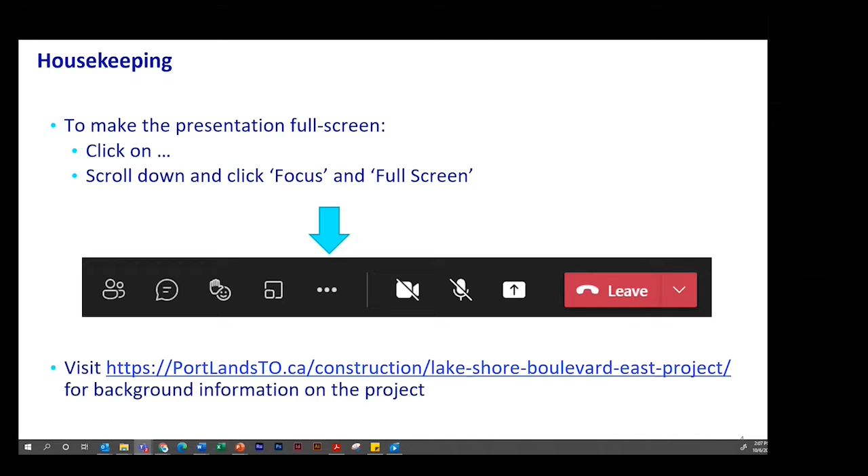So I'm going to ask Don to get us started in our presentation with the future plans section. Sure, thanks, Mara. I'll just quickly turn on my camera so people can see I'm a real person, and then to save some bandwidth, I'll turn it off. So starting with the big picture future plans, next slide, please.

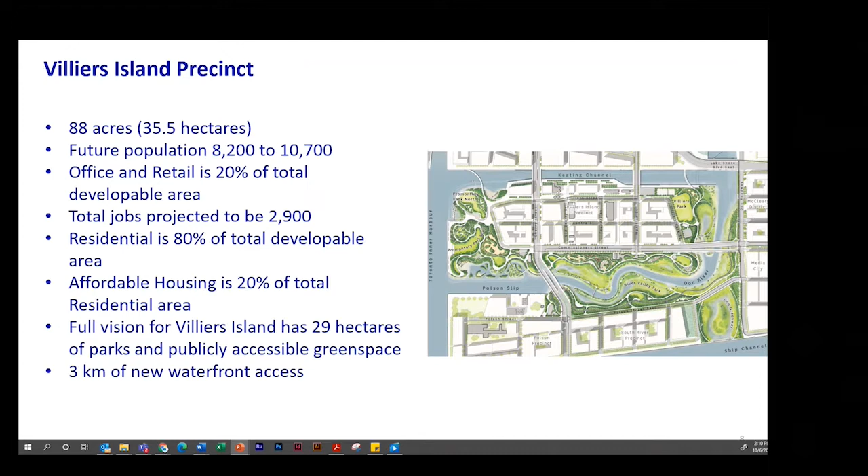The development is largely residential, of which 20% will be allocated for affordable housing, plus a generous amount of green space that's tied in with the waterfront along the Toronto Harbor on the west side, as well as the south side of Villiers Island, and it ties in with the green space along the new river channel. Next slide.

The Gardiner East project - I'm sure many of you are familiar with it. It's part of a larger program to rehabilitate the entire Gardiner Expressway that the City of Toronto is undertaking. The focus as it relates to the Portlands area is the section that lies east of Cherry Street, highlighted in red, showing the new proposed alignment for the elevated section of the Gardiner to tie in with the DVP.

And then the blue shows the new realigned Lakeshore Boulevard East section. Again, both the Gardiner and Lakeshore Boulevard are being relocated further north, away from the existing Keating Channel. Next slide.

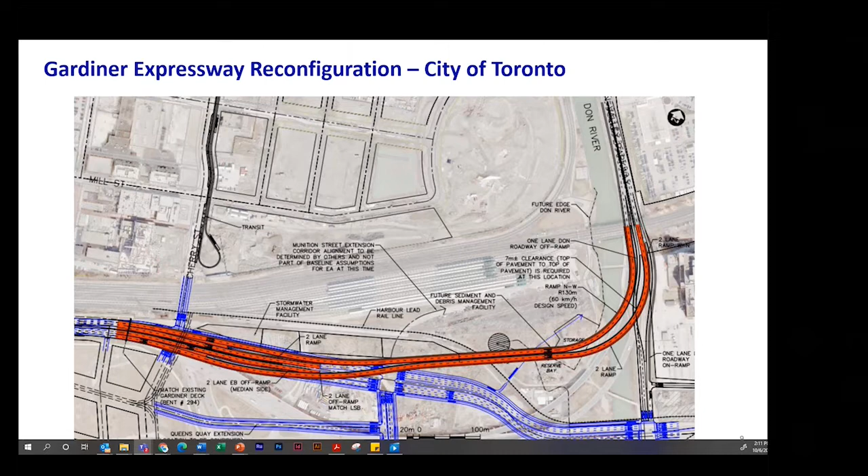So tied in with the Gardiner is the Keating Channel precinct. Again, these are the lands that lie between the Keating Channel in the south, and the rail yard, the Metrolinx rail yard, in the north.

In 2010, a Keating Channel precinct plan was released. It includes future development for mixed use, including both employment lands and residential. The key point here is that with the transformation of the Gardiner and other projects, there is a need to update the Keating Channel precinct plan to make it consistent with these infrastructure changes.

There was some visioning of development in the Keating Channel precinct area as part of the Gardiner EA, but those plans definitely need to be confirmed, and the City of Toronto will be undertaking an exercise to update the plan for this precinct. Next slide, please.

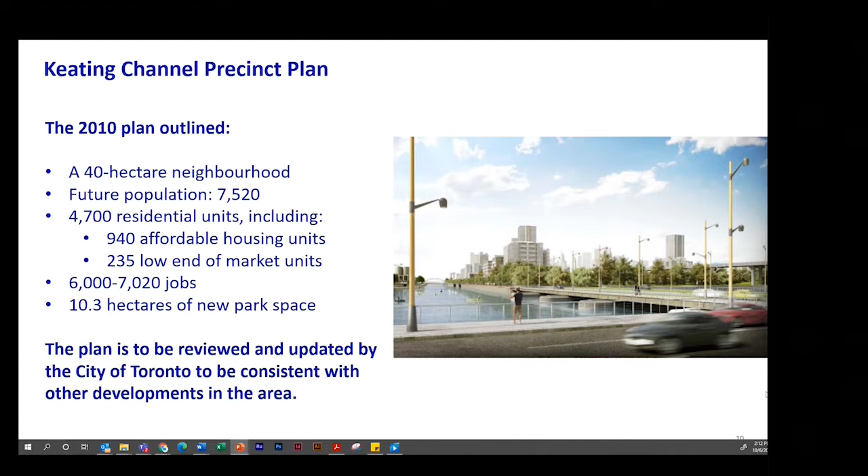So then zeroing in a little bit on some of the key projects, starting with the Portlands Flood Protection Project. Next slide.

So this image map shows or highlights the focus of the Portlands Flood Protection Project, which is the light blue area - lying south of the rail tracks, north of the ship channel, to the west of Don Roadway, and to the east of the Toronto Harbor. That's really the focus of the Portlands project.

And again, a key focus of these works is to alleviate flooding problems in the Lower Don area, and to allow new development in this area. Next slide.

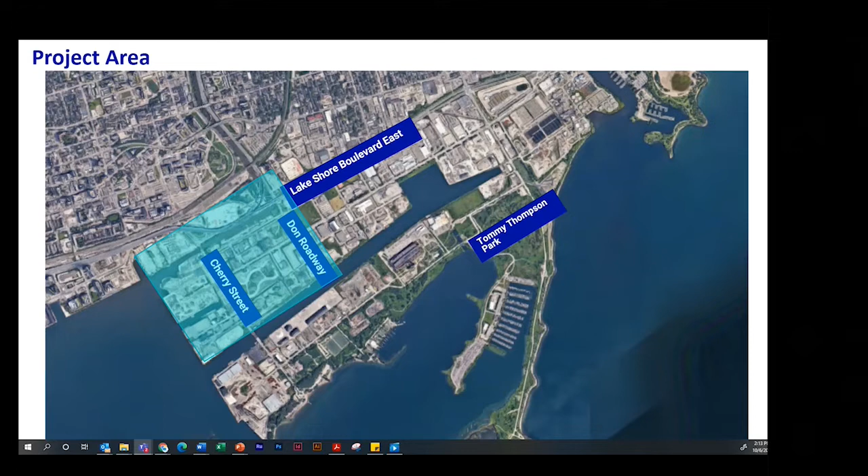So this slide shows what was recently the current condition of the Portlands area, highlighting the street network - Commissioners and Villiers being the major east-west streets, and Cherry, Munition, and Don Roadway the north-south streets - and the existing Keating Channel, which is at this point the major outlet for the Don River. Next slide.

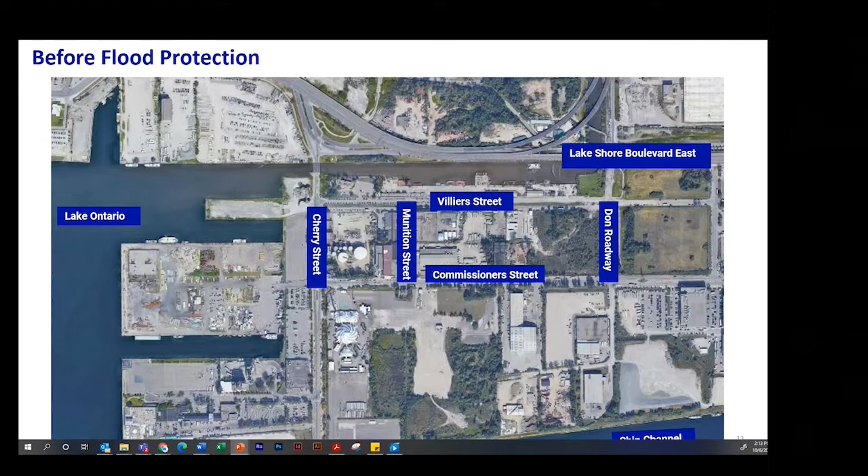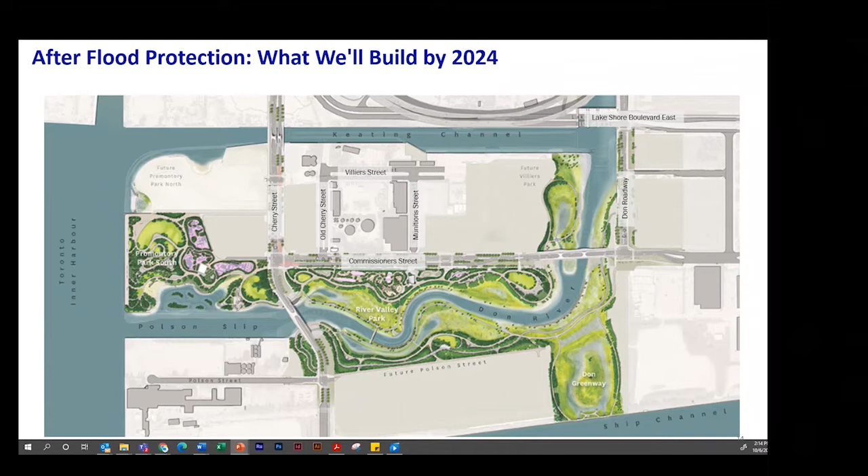And this slide shows what the transformation of the area will be by 2024, showing the second outlet, the new channel for the Don River that will extend through the Portlands, and the creation of new green space along the new river channel, as well as green space along Toronto Harbor, and the area just lying to the north that I spoke to earlier, the Villiers Island area, that will also be redeveloped. Next slide.

So then moving on to Lakeshore Boulevard East. Next slide.

So as indicated earlier, the City of Toronto is embarking on a long-term rehabilitation program for the entire stretch of the Gardiner Expressway, extending all the way over to Highway 427 in the west, to the Don River in the east, which is the focus of our works that are currently ongoing.

Most recently has been the rehabilitation of the Jarvis to Cherry section. And then with that will be the continuation of the Gardiner East project, which is the realignment of the Gardiner between Cherry and the Don Valley Parkway, to occur in the 2026 to 2030 period. Next slide.

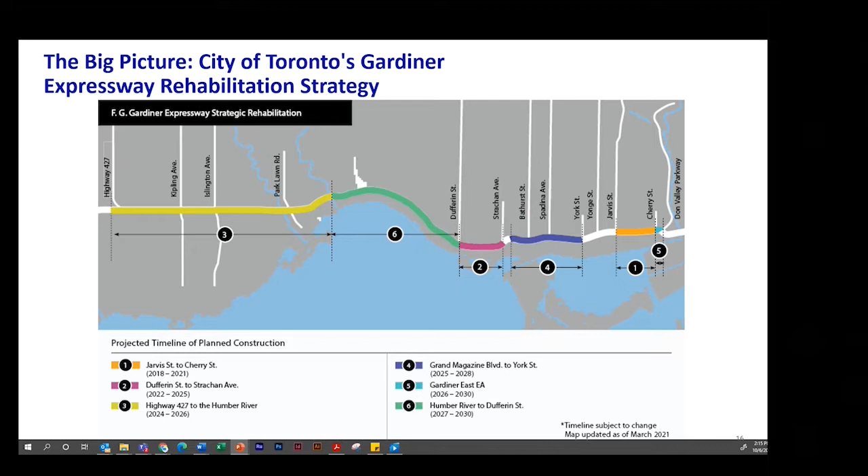So talking a little bit about the Gardiner Expressway project. This project was commenced as an individual environmental assessment in 2009, focused on the most eastern section of the Gardiner Expressway, extending from Lower Jarvis over to its eastern terminus.

A preferred alternative was developed through the Gardiner Expressway East EA. This environmental assessment received approval both by City Council and the Province of Ontario, as it was an individual environmental assessment. The key components include maintenance of the overhead Gardiner Expressway between Jarvis and Cherry, but improvements to Lakeshore Boulevard and public realm pathways beneath this elevated section. Then the removal of the existing Gardiner DVP connection that runs along the north side of the Keating Channel, and relocating the Gardiner further north. The section between Cherry and the DVP, along with the realignment of the overhead Gardiner, is a realignment of Lakeshore Boulevard East.

Running between Cherry and the Don River crossing, and then east of the Don River is a removal of the overhead expressway, or what's known as the Logan ramps, that formerly touched down to Lakeshore Boulevard. Those have now been removed. And then the reconfiguration of Lakeshore Boulevard east of the river. Prior to the removal of the overhead Gardiner, Lakeshore Boulevard was split between eastbound lanes and westbound lanes. With this project, those lanes east of the Don River are being brought together in a more conventional arrangement.

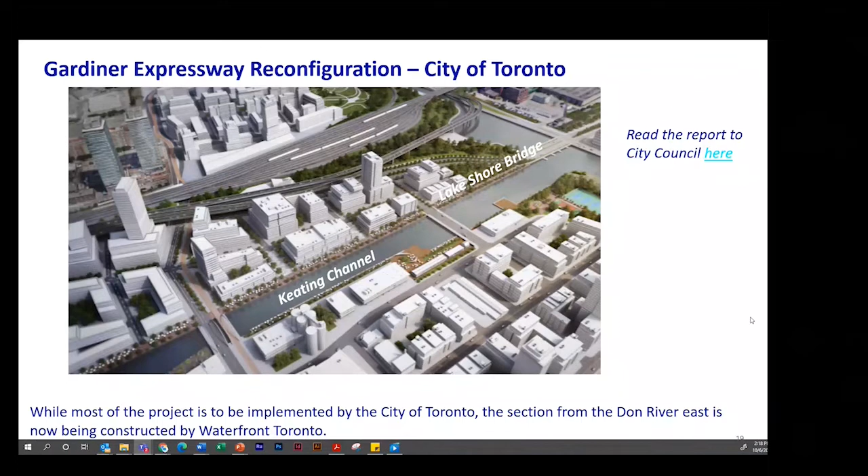So in terms of what's happening now, we talked about the big picture, long-term vision for the area. We're now going to zero in a bit more on what is happening now. Waterfront Toronto is now embarked on the implementation of some elements of the Gardiner East project, as well as the Portlands flood protection project.

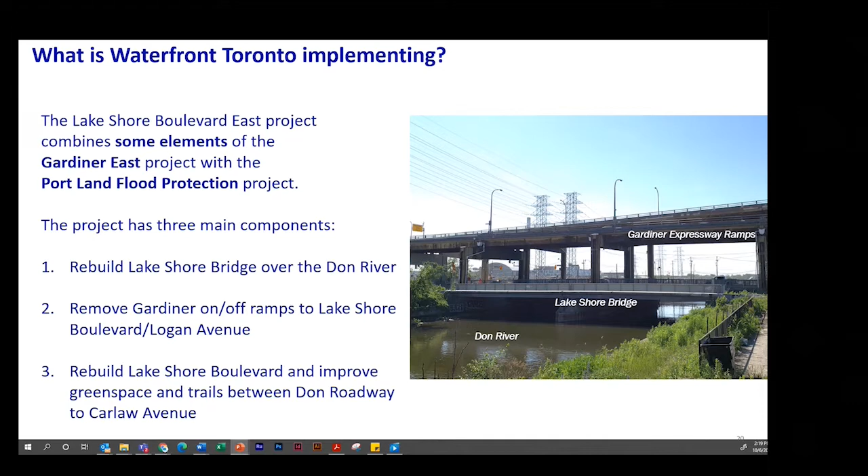This project has three main components. First, it includes a rebuild of the Lakeshore Bridge over the Don River, the removal of the Gardiner on-off ramps, or the Logan ramps, which has now happened, and then the rebuilding of Lakeshore Boulevard over the new bridge, extending east over to Carlaw.

It would also result in 2 years less of traffic disruption. Instead of rebuilding the bridge for flood conveyance reasons and then going back in the future for transportation reasons, it's all being done at one time, resulting in less traffic disturbance. Thirdly, it's a much safer construction process if those overhead ramps are removed in advance of the reconstruction of the Lakeshore Boulevard Bridge.

And finally, advancing the Lakeshore East section of the project results in new pedestrian and cycle pathways, and public realm green space being realized along Lakeshore Boulevard East 4 years earlier than if the projects had been separated.

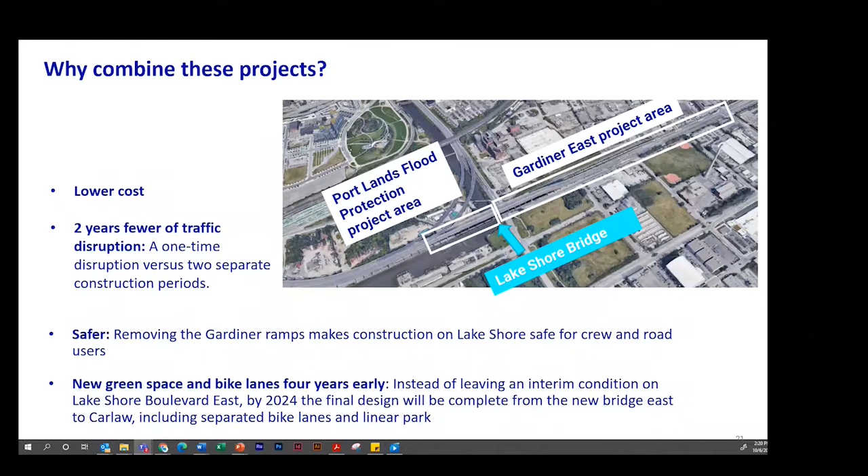The first component of the bridge project is to essentially lengthen the bridge, in an east-west direction, and create new bays. That's to improve river conveyance to flow under the bridge during flood conditions. So that's the lengthening component of the bridge, or of the project, again focused on flood reduction and improving river conveyance.

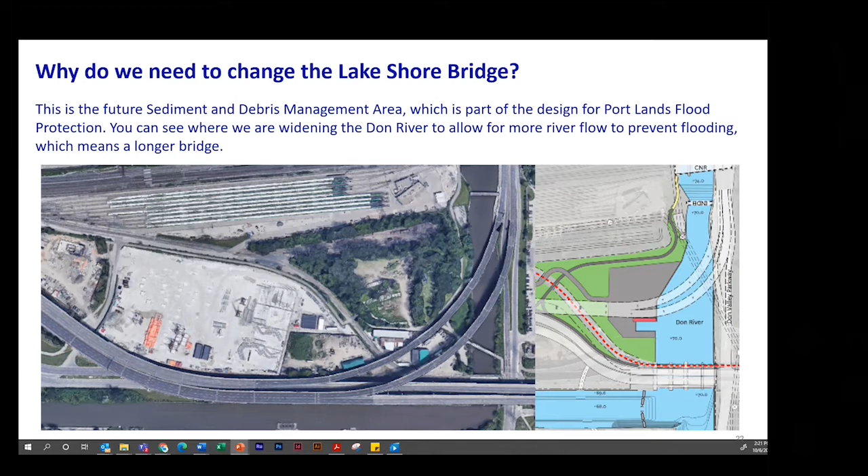The second part of the project is really for transportation reasons, and it involves a widening of the bridge. That's to allow for more space on the bridge deck for pedestrian and cycle movement, as well as improvements related to traffic flow. So again, the bridge is being lengthened and the bridge is being widened.

To do that, essentially it involves an extension of Lakeshore Bridge and the adjacent rail bridge by two spans, relocating utilities from the existing rail bridge, and the replacement of the Lakeshore Bridge and the rehabilitation of the existing piers and abutments.

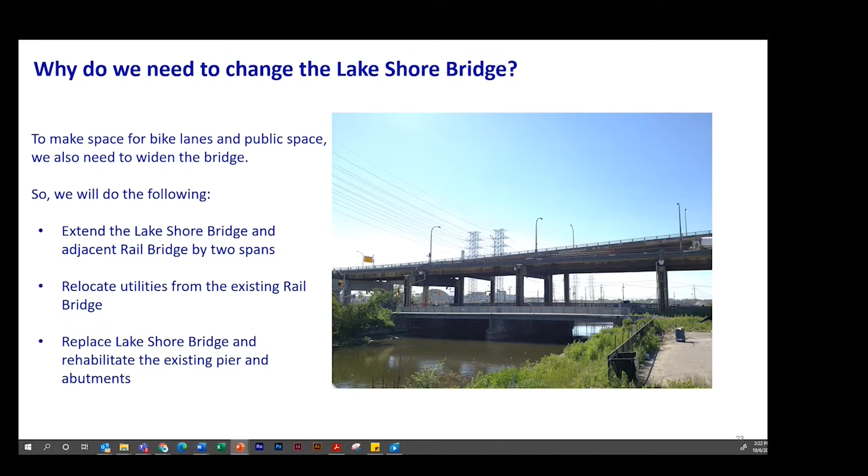So how are we changing Lakeshore Boulevard East? This is the section of Lakeshore Boulevard from the Don River over. These changes are being guided by two documents. First is the Gardiner East Environmental Assessment that presented a conceptual design for Lakeshore Boulevard. Then secondly, the subsequent Lakeshore Boulevard East Public Realm Plan that was developed to further advance the design for Lakeshore Boulevard from Jarvis Street over.

This Public Realm Plan is a vision for about 3 kilometers of Lakeshore Boulevard, and it develops in more detail the plan for the roadway, for public realm space, for green space, as well as active transportation facilities throughout the entire corridor.

This stage of the project includes the realignment of Lakeshore Boulevard from Don Roadway over to Carlaw Avenue. Even though for the most part Lakeshore Boulevard is being maintained within its existing right-of-way, with the removal of the Logan ramps there is more space for the roadway, so there's some adjustments to the alignment of Lakeshore Boulevard through this space.

New pedestrian and cycling facilities and landscaping on the Lakeshore Bridge and Lakeshore Boulevard from Don Roadway to Carlaw. And then the shifting of the existing rail tracks that sit on the north side of Lake Shore Boulevard, east of Don Roadway, to the center median of the new Lakeshore Boulevard, with the idea of connecting those tracks to the existing tracks at Carlaw, which are already in the middle of the roadway. Next slide.

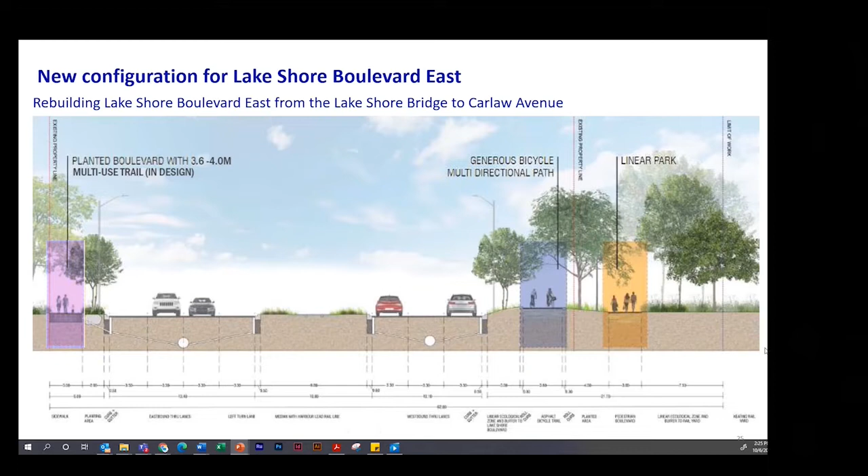Multi-directional cycle path, more plantings, then the pedestrian walkway, and then more plantings. Next slide, please.

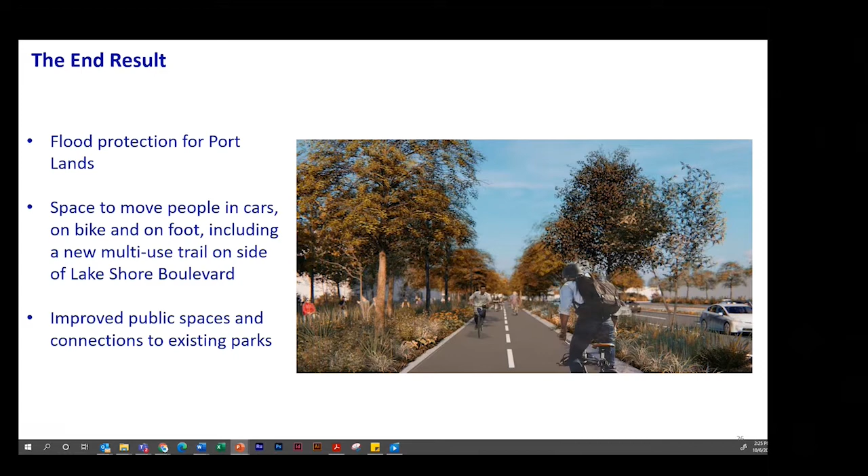So the end result of the project is flood protection for the Port Lands that will facilitate new development in the Port Lands area, creating new space to move people in cars, on bike, on foot, including a new multi-use trail along the north side of Lake Shore Boulevard, and improved public spaces and connections to existing space in the waterfront area. Next slide.

At this point, we're going to invite Julius from Waterfront Toronto to provide an update on the Port Lands construction. Thank you.

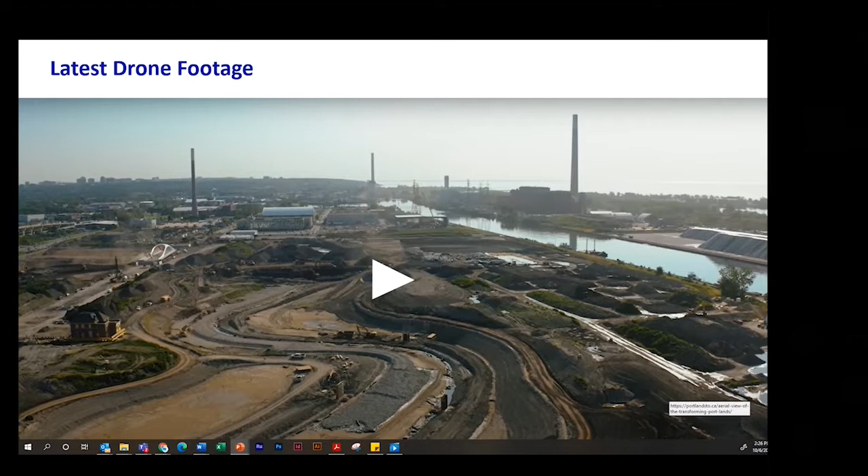Next slide, please. We're going to have a little drone footage over the site. This is quite recent.

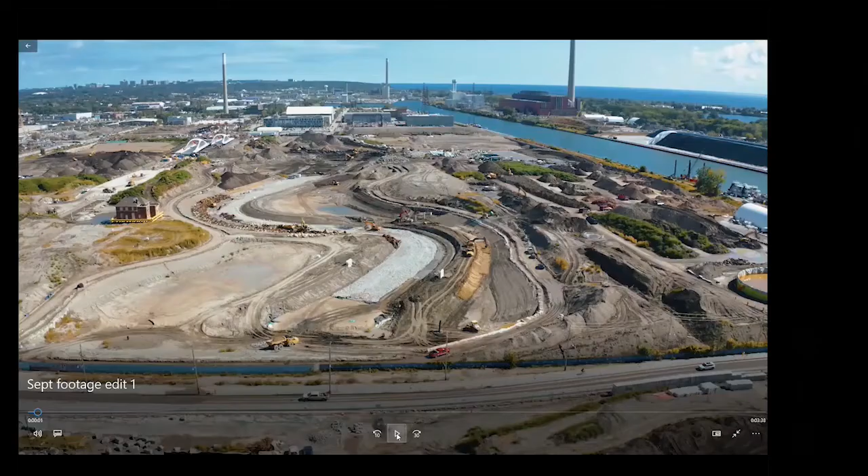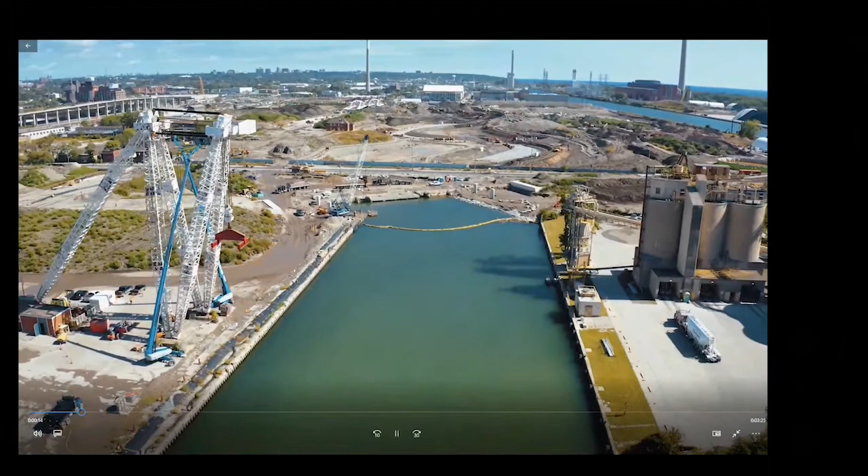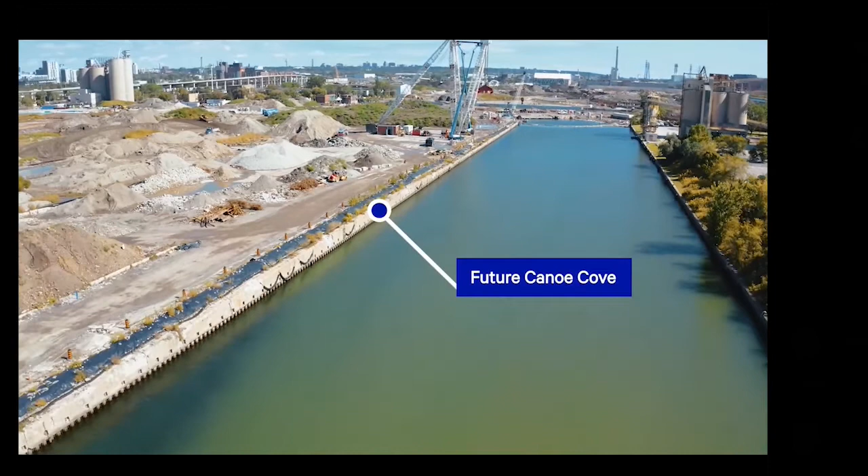We're looking over the river here. This is the new Cherry Street Bridge foundation that you're seeing in the Polson Slip. The crane is off to the left. We're just starting work now on the dock wall on the left side of the slip. This will be becoming Canoe Cove, where we'll be setting up smaller islands and public access to the water.

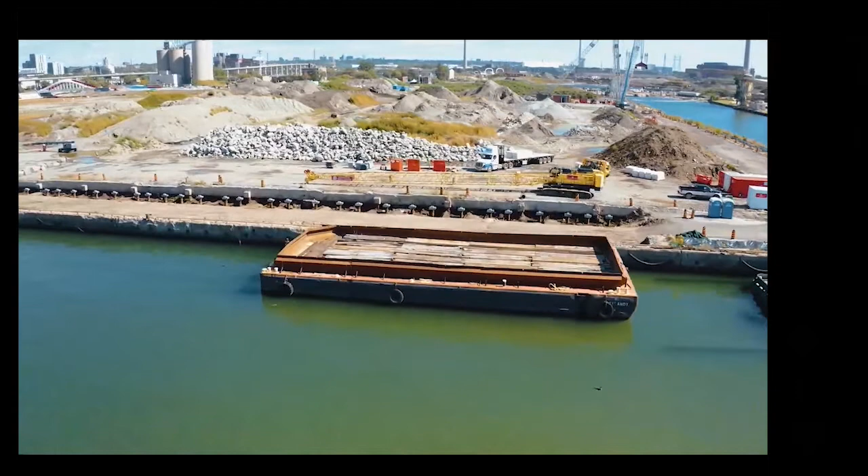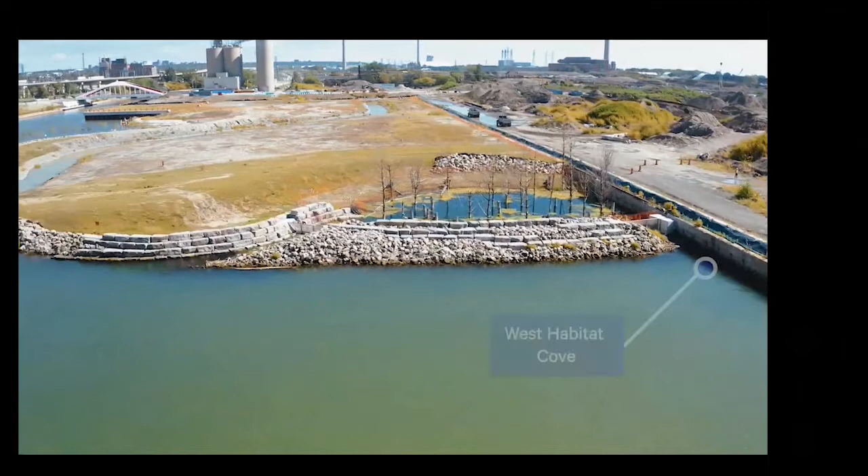We're now moving along the face of the dock wall where MT35 used to be. We're doing dock wall repairs right now, modifying tiebacks and stabilizing the dock wall. This is the fish habitat, and we've had great success with this, with species coming back into the harbor. This is the lake fill area that was completed early in the project.

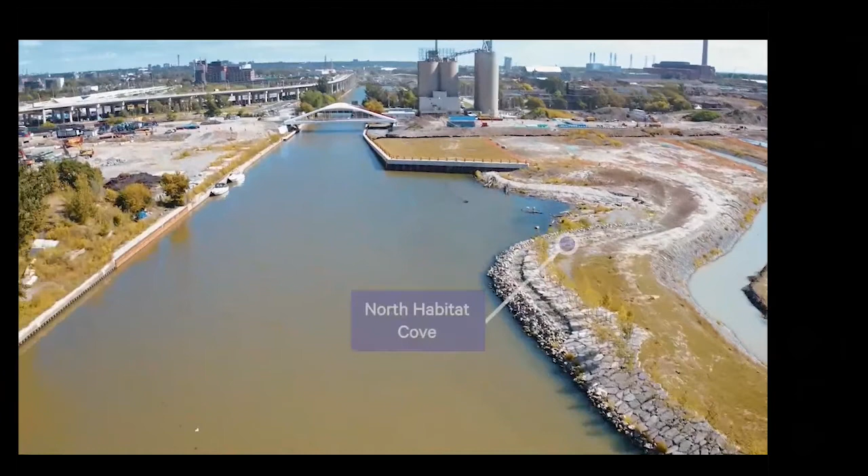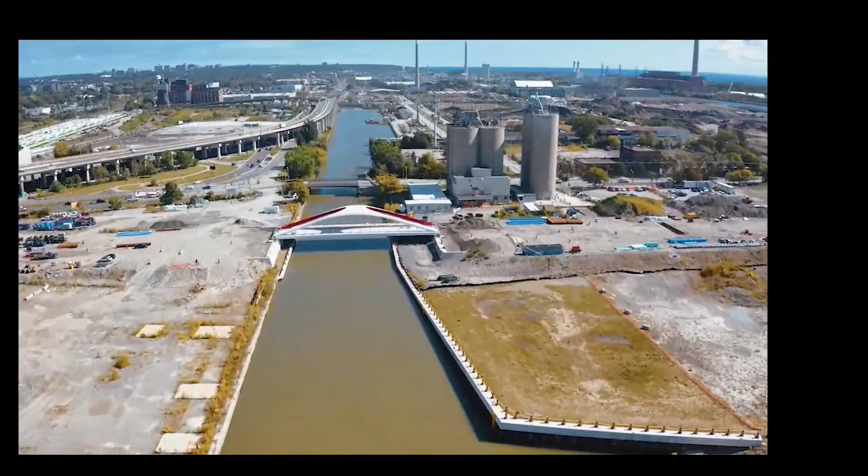Now we're moving down the Keating Channel. This is the other cove that was created for fish habitat. This is the new Cherry Street Transit Bridge. We're expecting another bridge for this location for vehicles next spring. The old Cherry Street Bridge will be removed and the Keating Channel widened in this area.

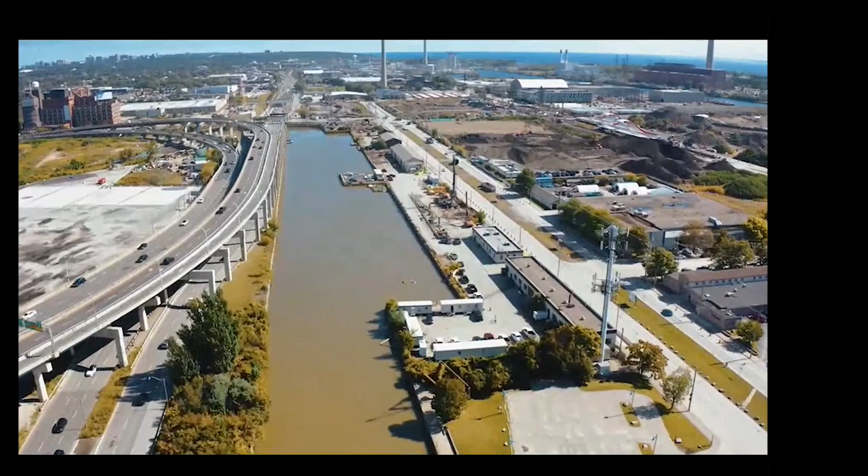You can see the Gardiner demolition in the distance here. We'll get closer. To the left, you can see where the sediment management area is going to be, beyond the curves of the ramp down to the river level.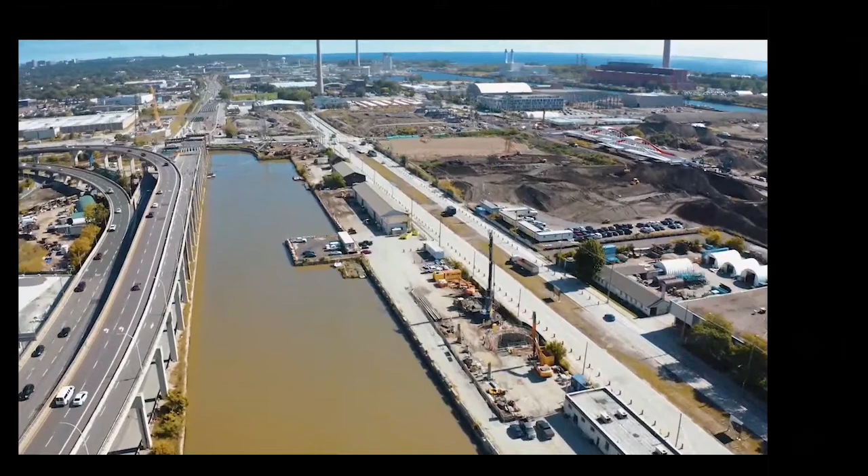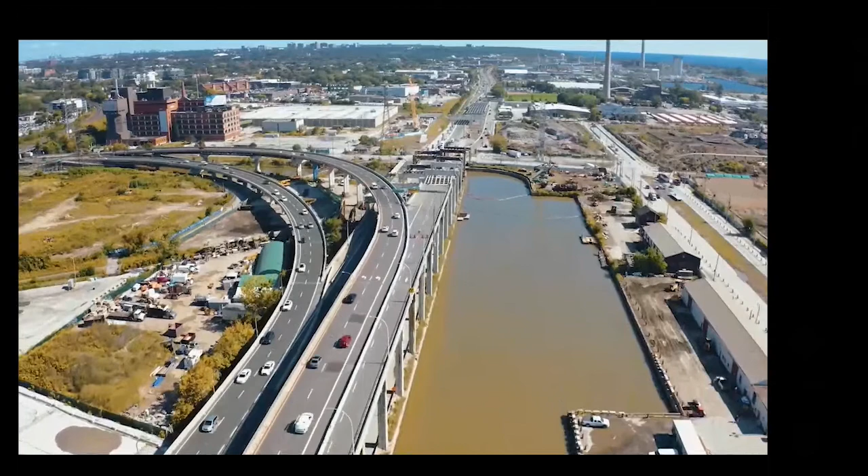Now you can start to see the extent of the removal of the ramps. So we've removed - well, since this image was taken, the bents have also been removed. The sediment management area I referred to earlier doesn't quite come back this far, but it's in this area.

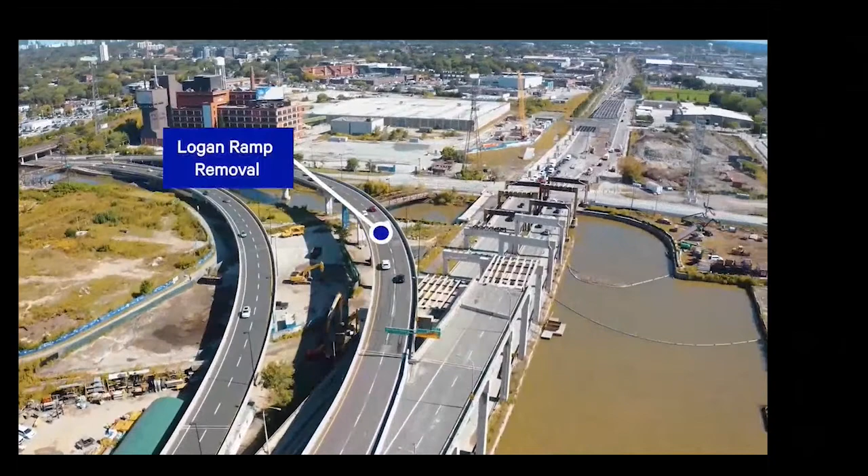Logan ramps are shown here as now removed. Since this image was taken, the bents are gone and the balance of the ramp structure is gone. This is the Don roadway.

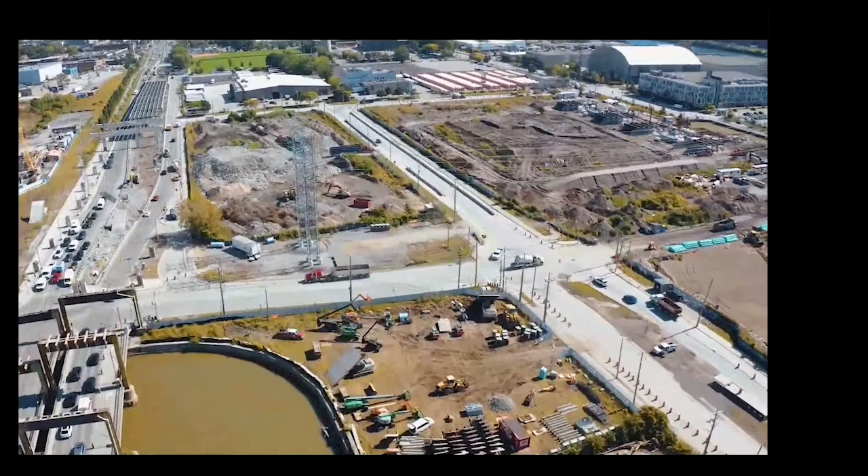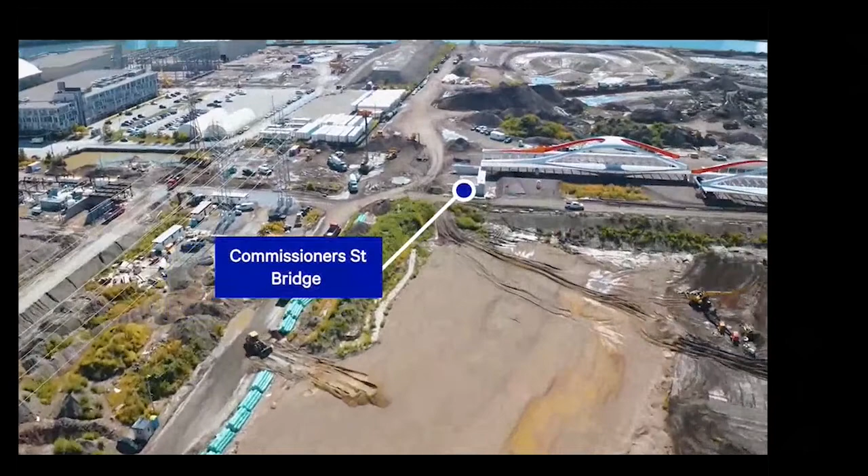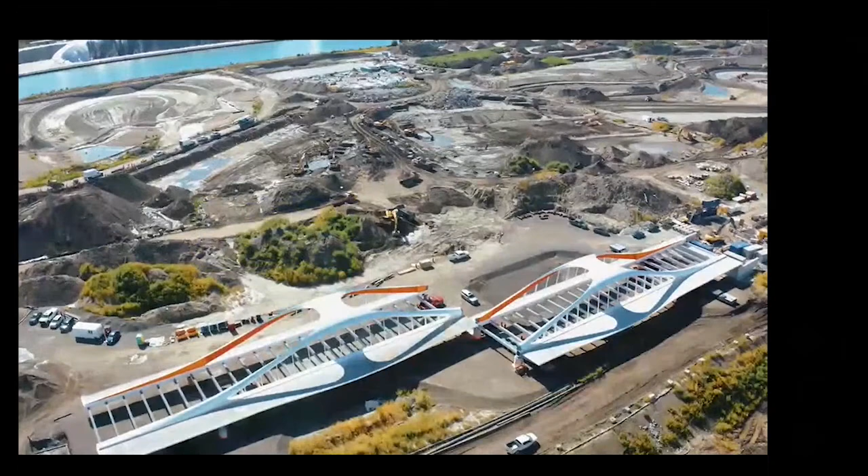We have the ice management area here at the bottom left. This will be the river moving south. The bridge is being moved into place here where the large mounds are. This is what we call the elbow. Straight ahead is the Don Greenway spillway, and then you turn back to the river where we started.

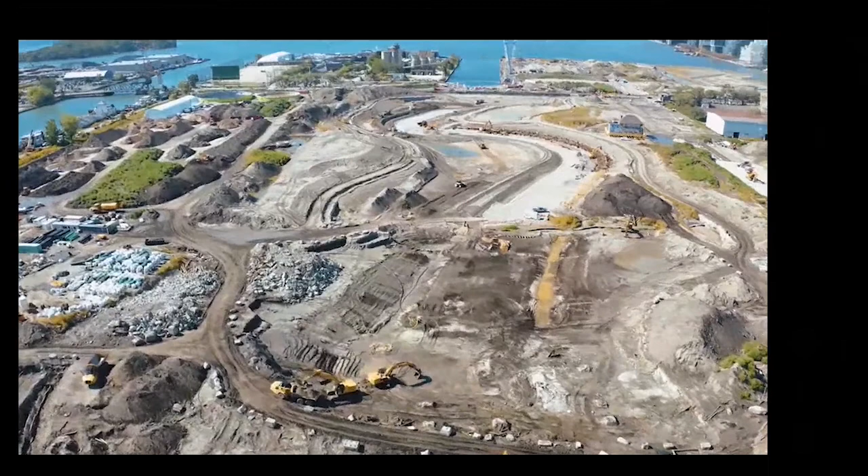You can see that the river profile has taken shape now, as is the spillway. We've excavated about 700,000 cubic meters of soil and treated it. We still have another 700,000 to go.

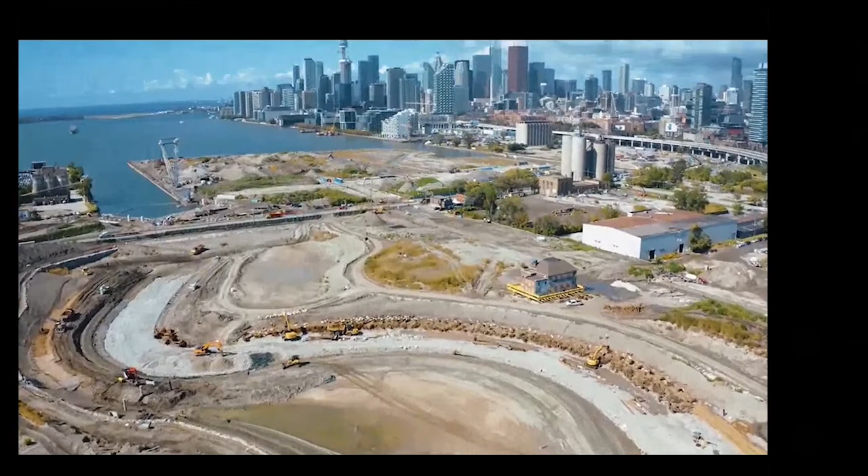You can see that the river structure is continuing. They're putting in timber along the perimeter again to support fish habitat and structure. We're putting in foundations for pedestrian bridges, and now circle back to the new river mouth that'll come out through the Polson slip.

And ahead of us to the right is the Cherry Street Lakefill. Thank you.

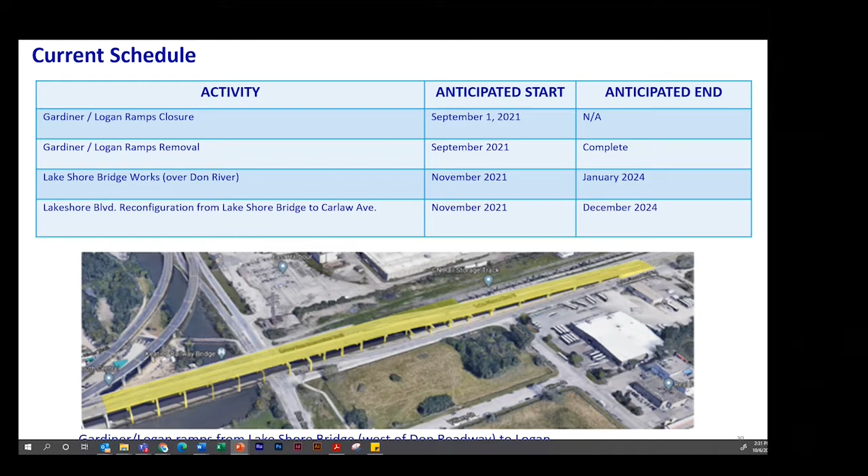So we've closed the Gardiner ramp and got on with demolition quickly. The removals have been completed. Lakeshore Bridge work will commence in November and continue through till January 2024. The Lakeshore Carlaw work, extending off to the east to Carlaw, will continue until December 2024, noting that the flood protection project overall will be completed by March 2024.

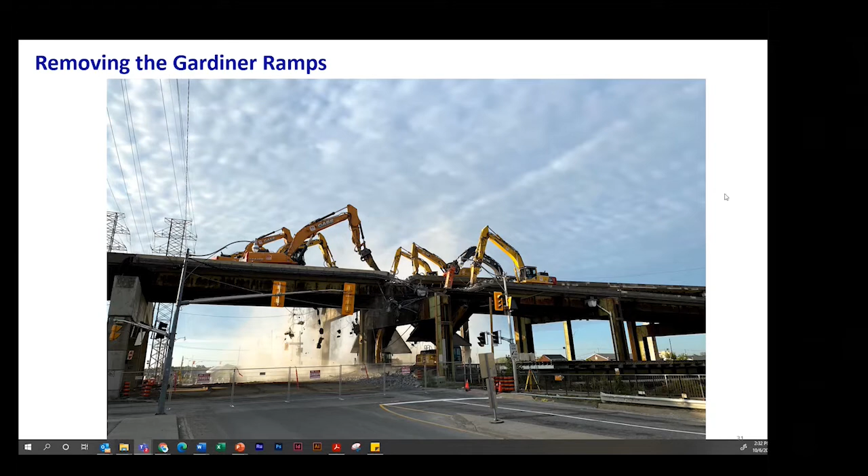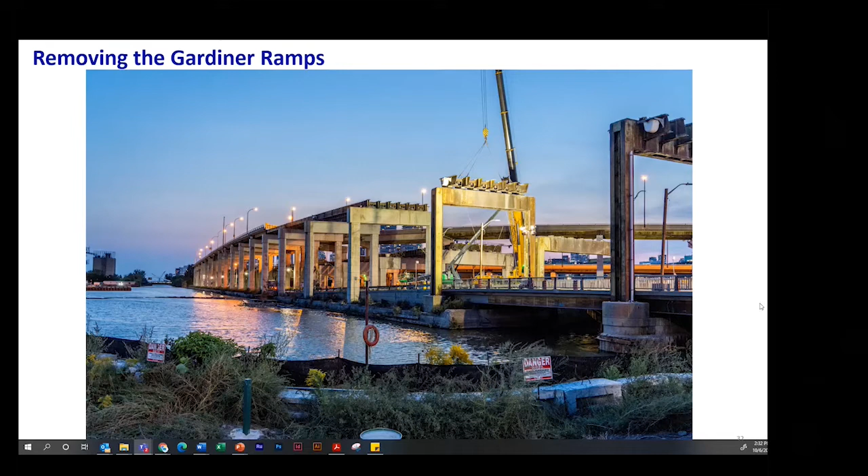So this was when the steel was being pulled down. Bents were still up in place. We're now looking down the Keating Channel. Again, this was work that went on day and night over those weekends.

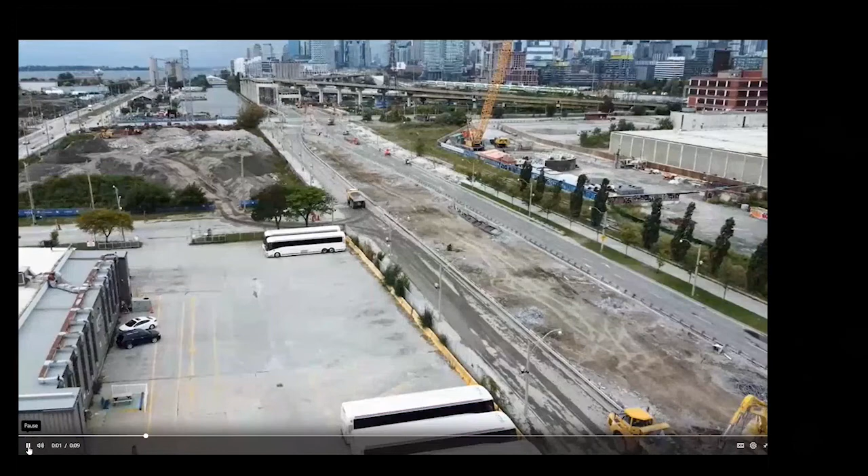And again, looking to the west, you see some of the bents in the structure just prior to demolition. We've lost the image - and back. Now this is looking along Lakeshore again, and you see the center section of the ramps gone. So that's a fair bit of real estate that we've gained, which will accommodate new design, new structure, new bicycle paths and walkways, and landscaping along Lakeshore Boulevard, and we'll be increasing lanes.

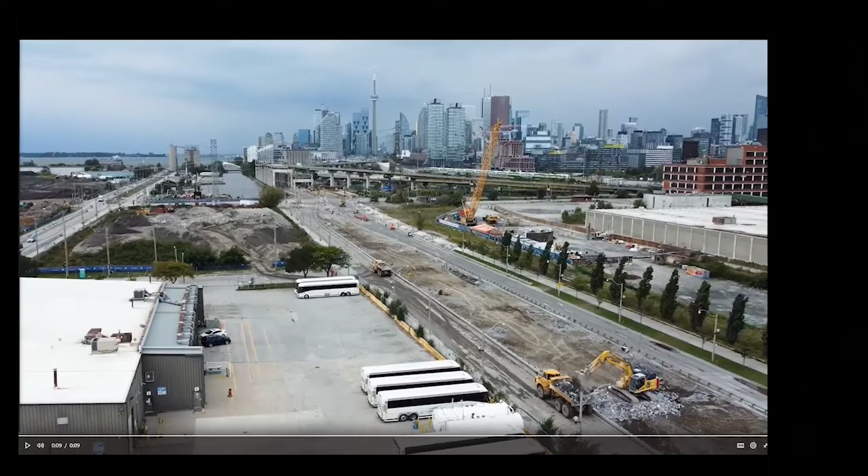So the next set of slides are going to focus on what's going to happen over the next few months and years as the construction continues on the project.

In terms of Lakeshore Boulevard, in terms of what to expect, there will be lane restrictions starting this month and continuing to 2024, so we're looking at about a 3.5-year construction period. These include lane restrictions on Lakeshore Boulevard between Carlaw and Cherry Street. Mid-October to December 2021, there'll be 1 lane in each direction on Lakeshore Boulevard at the Cherry Street intersection. Then December 2021 to 2024, we will maintain on Lakeshore Boulevard 2 eastbound lanes and 1 westbound lane between Cherry Street and Carlaw Avenue.

In addition, a number of intersection traffic control measures will be put in place, including lanes marked using traffic barrels and signage. Traffic control will be done by paid duty officers at intersections while the construction work is occurring. As well, there'll be flag persons present to control construction vehicle movement when crossing public spaces such as roads, sidewalks, bike paths, etc. The other important point is to realize that the construction management plan is expected to evolve.

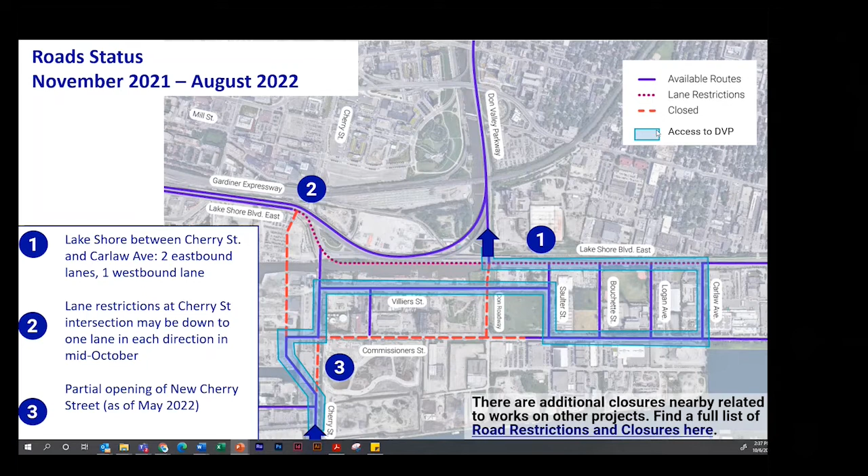Now moving on to closures and detours for cycling and pedestrian facilities.

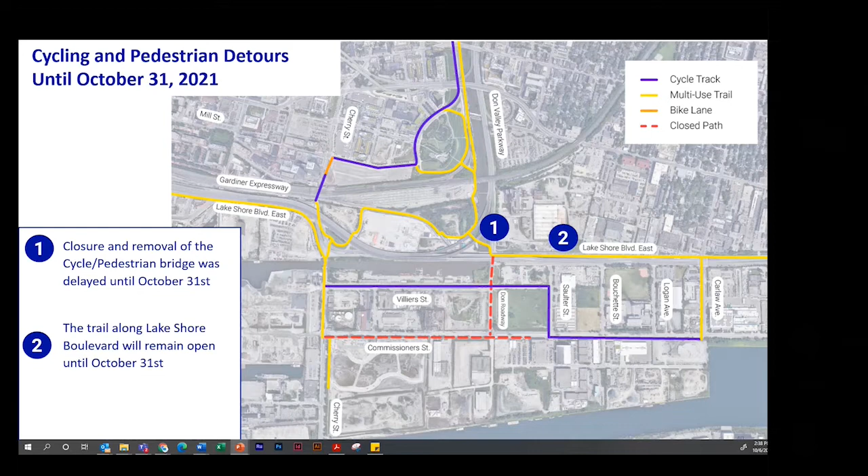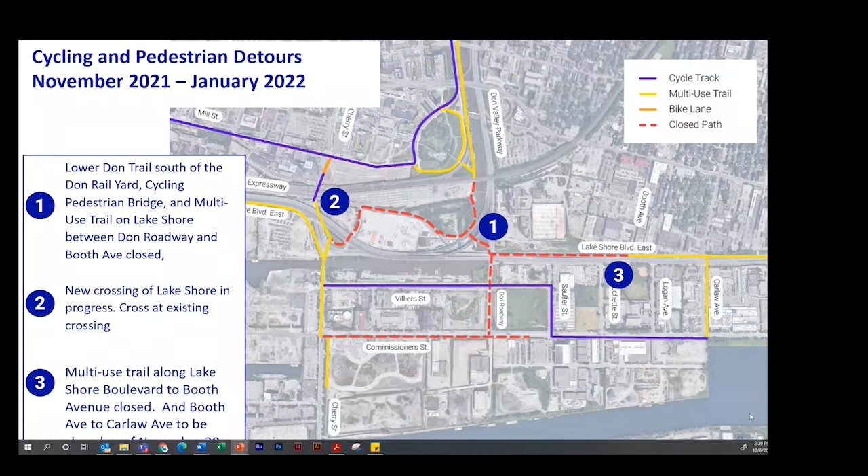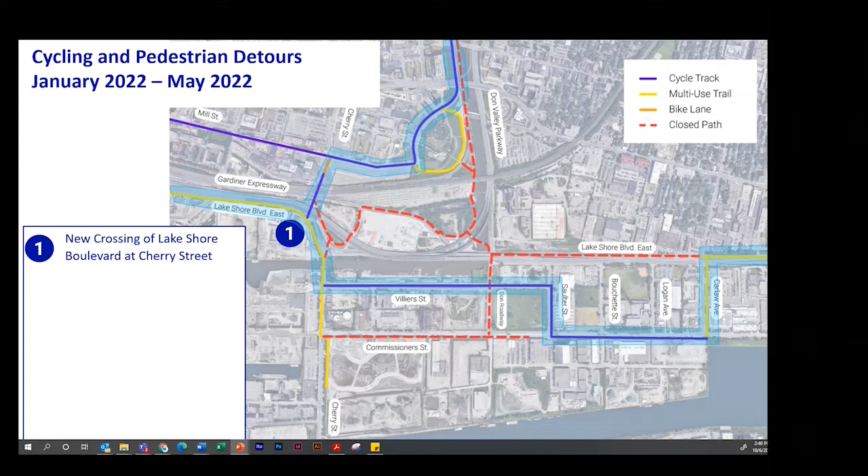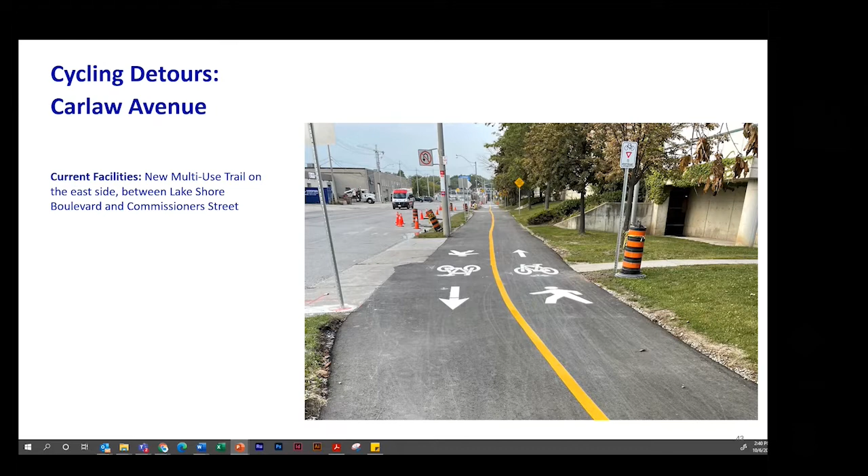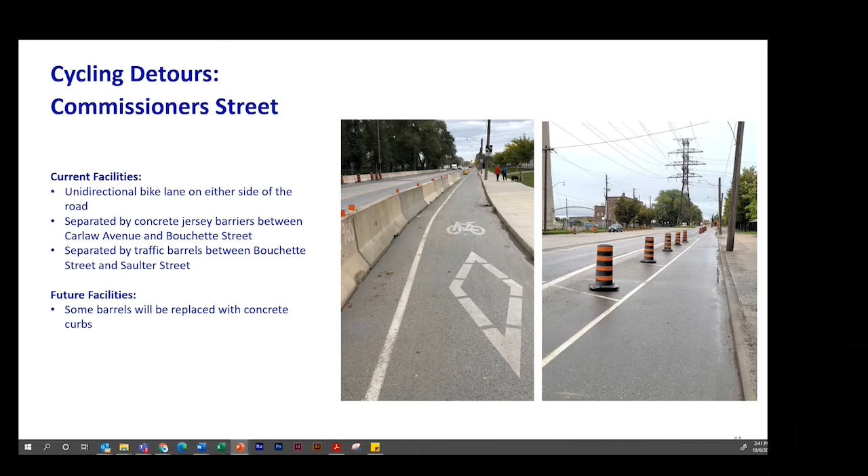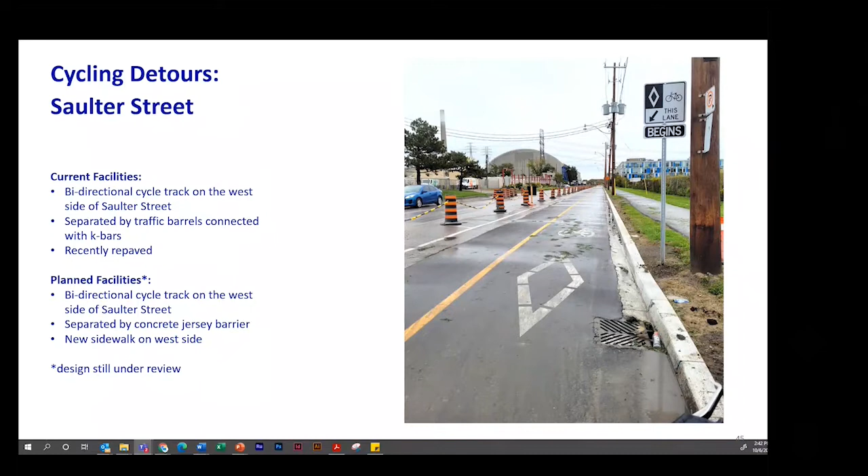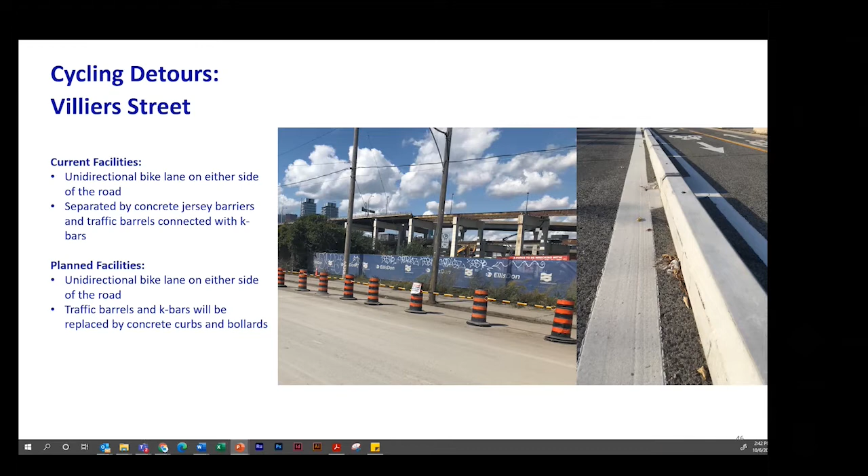Now on Villiers Street, currently there's a unidirectional bike path or bike lane on either side of the road, separated by concrete jersey barriers and traffic barrels connected with K-bar. The planned facility will include the traffic barrels and K-bar being replaced by concrete curbs and bollards, shown in the right side image. Next slide.

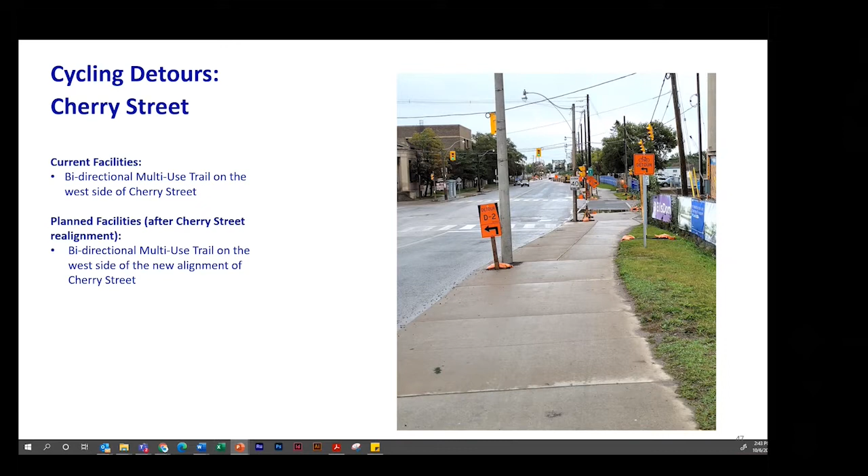Ending with Cherry Street, providing connection back up to Lakeshore Boulevard. The current facility includes a bidirectional multi-use trail on the west side of Cherry Street. The planned facility, after the Cherry Street realignment, will include a bidirectional multi-use trail on the west side of the new alignment of Cherry Street. Next slide, and at this point Myra from WT is going to talk about what we've heard to date and the feedback to some of the key comments we've received.

Thanks, Don. For those who don't receive our weekly traffic notices that we've been emailing digitally, I'll make sure we put a link in the chat so you can sign up. Week to week, especially during the weekend closures of Lakeshore Boulevard, where there's been significant impact on vehicular and cycling traffic, we've been doing a roundup of key issues we've heard, whether you've called, emailed, or tweeted at us, and some of the things the team is doing to adjust the traffic management plan where we can to hopefully alleviate some of that pressure, not eliminate it.

Next slide, we'll go through a couple of these. It's not exhaustive by any means, but these are some of the things we heard most.

This slide speaks to what I was just saying, that we've had five weekends of construction with closures on Lakeshore, which meant detours for drivers, cyclists, and pedestrians who might have been using the Lower Don Trail. This is a major transportation network, so when you close it down you see a ripple effect. That's why we did extensive traffic studies and modeling, but even so we need to watch how the impact plays out in real life and listen to the feedback we're hearing from people trying to navigate through these areas.

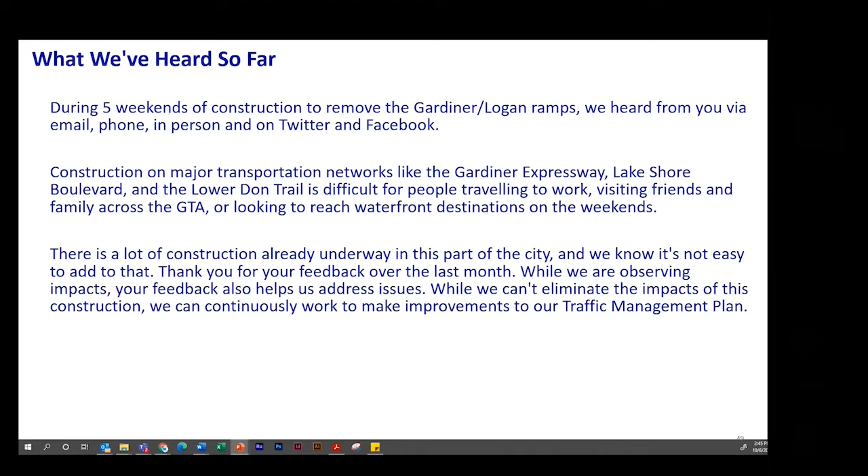Increased travel times and congestion, of course. We have a traffic management plan in place. We've already removed parking along the detour routes during weekend closures to try to keep traffic moving. During our traffic study, in coordination with the City of Toronto, we reviewed over 70 intersections and made adjustments at 18 of them to help traffic flow in the areas we'd identified as pain points.

Since we heard more feedback once work started, we also added a left turn restriction at Empire Avenue from Eastern Avenue on weekends, with traffic enforcement in place to make sure that was abided by. We also had a traffic control agent, in collaboration with the City of Toronto, stationed—sometimes more than one—at the intersection of Jarvis and Lakeshore Blvd, to help manage traffic moving onto the Gardiner ramps there at Jarvis. Next slide.

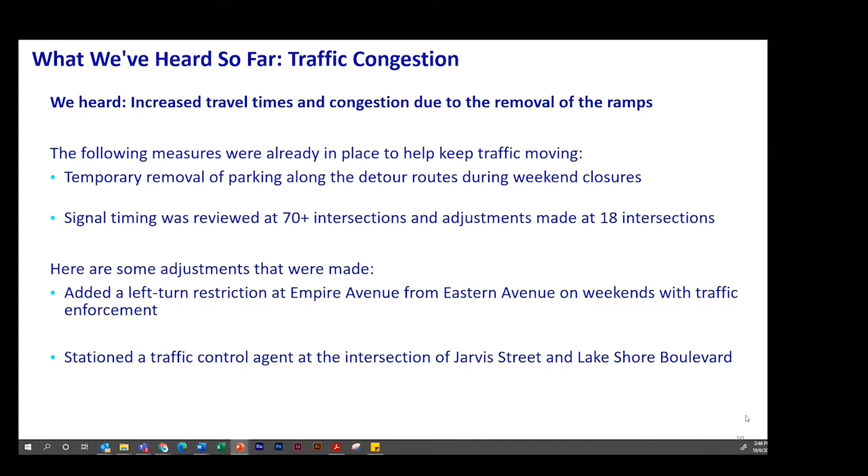We also heard that concurrent projects and overlapping closures were causing a lot of congestion and issues for people and longer travel times. It's an unfortunate reality right now, especially in the East End with all the change happening, this really positive revitalization that, of course, in the short term is difficult to work through, knowing there was going to be other work in the area.

There were some unanticipated closures due to work going on a little longer than anticipated. One was Lake Shore Blvd near Cherry Street. Enbridge had to complete some work that extended into mid-October, so that was an overlapping closure with our work on Lakeshore and Gardiner. That should be cleared up before we restart our work in November on Lake Shore Blvd, but I want to flag there may also be some lane restrictions related to our work on Port Lands flood protection in that same area.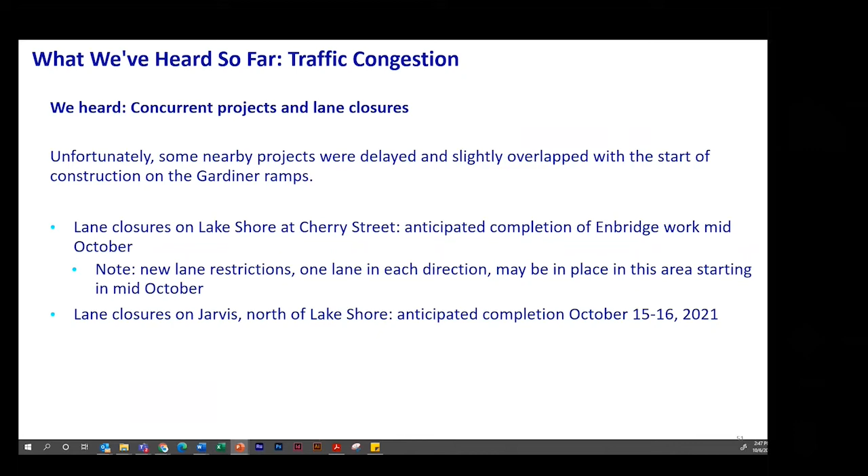We'll come back in our digital traffic notices with specifics if that closure actually has to be put in place. There were also some lane closures on Jarvis due to work the City of Toronto had to complete just north of Lakeshore, which is also anticipated to be complete before we restart our work. So we're anticipating that when we get back to work on Lake Shore Blvd, we won't have those overlapping closures.

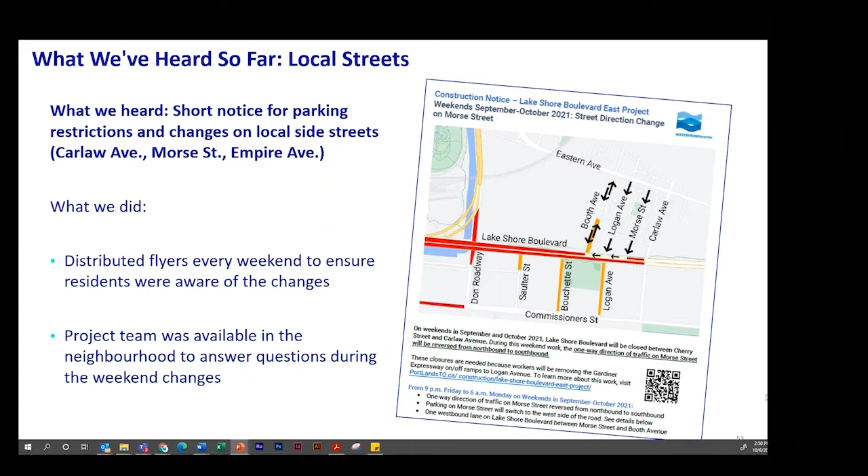Noise. Of course, removal of the ramps from the Gardiner is going to cause noise. There was jackhammering on weekends. We had significantly more noise complaints on the first weekend than every weekend thereafter, and we think that's because after the first weekend, EllisDon investigated and found the jackhammers were making contact with metal beams, causing more noise than necessary. The contractor adjusted that and reduced the noise level.

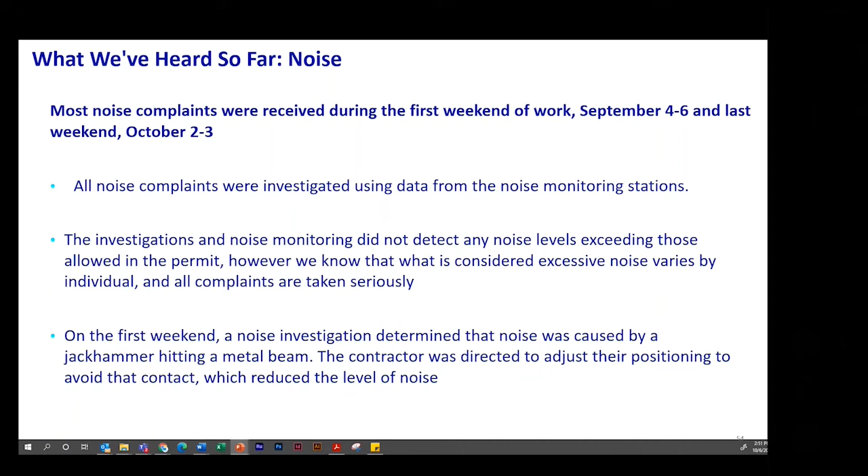But we know people were still hearing noise on weekends, and we're happy to say that's now complete. So that's some good news. Next slide.

So we also heard and are still processing feedback from cyclists using those detours. We saw that even though we anticipated they would be ready in time for closures, not all of the physical separation on the detours with the jersey barriers and concrete curbs that were in the design was in place. There were barrels in place, which is typically an accepted city standard. But we also know that this is a high traffic area and a big detour for cyclists.

On a significant route, the Lake Shore Multi-Use Trail and the Lower Don Trail, we worked with our construction manager to delay the removal of the pedestrian bridge over the Don River, that Lower Don Trail east-west connection, until the end of October, to maintain the existing connection until all the components of the planned detour can be installed and fine-tuned.

When I say fine-tuned, we've received a good amount of feedback from people using the trail. We've collected it all, we've logged it all. We're working with the project team on our end, as well as our colleagues at the City of Toronto.

To make sure that we are responding to all of the comments that we got. The update on the detours themselves is that jersey barriers, those high concrete barriers, are in place everywhere planned in the design. There are barrels with k-bars in between them in place at some locations where we are waiting for concrete curbs, those lower concrete curbs, because the materials have not been available. We anticipate that when we need the detours in place again in November, all of those curbs are going to be in.

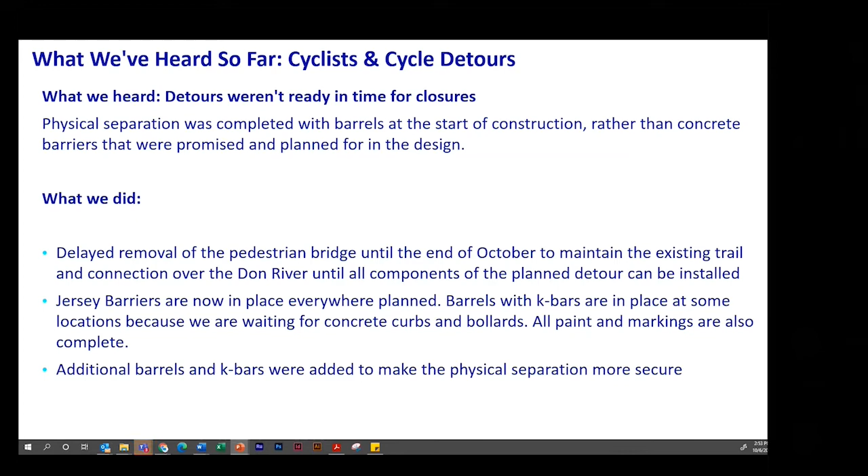One of the main pieces of feedback we got was around wayfinding on the trails. There is a comprehensive signage plan that was developed in consultation with the city and approved. But as I said, the same thing with the traffic modeling, once people start using these routes, the real world experience means that we're getting feedback that we need to take seriously. So we did. Based on the specific feedback we got from cyclists, here are some pictures of a couple of the locations where we added more wayfinding and signage.

There are a couple more places that we've been getting feedback on, so we'll take a look at that as well to make sure we can guide people as clearly as possible. We also have about 35 information signs with maps on them at what we identified as key decision points on the trail, to try and get people the information before they go too far down a route that's going to cause them to have to turn around, for example.

It would be useful if people don't feel that those are helping, or if there's other information, let us know. Right now those signs are going to be covered because we don't want people to think that the detours are currently in place. The detours are not in place anymore and won't be until the end of October. So we have a little bit of time, we have to make new signs anyways. We welcome your feedback if there's something about those signs that you felt wasn't particularly helpful.

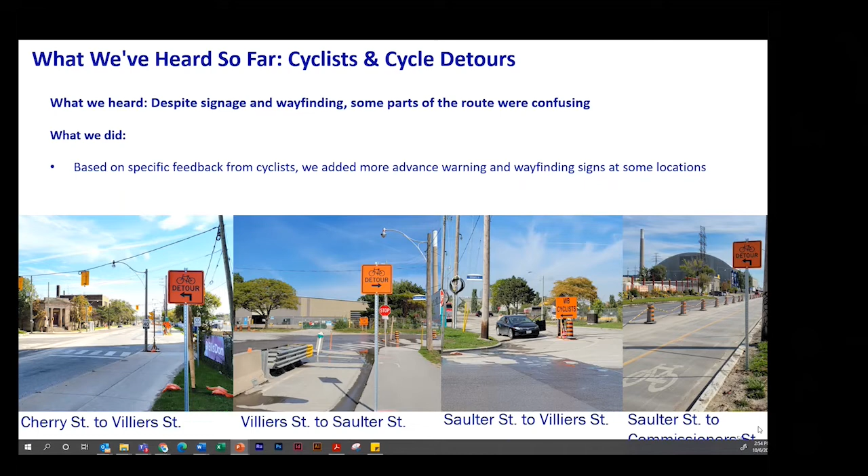We also had some feedback about intersections for cyclists, especially connections between the bi-directional trails, so trail east-west on one side of the street, and the unidirectional trails on the north and south side of the street. We followed up and installed bike signals at Carlaw and Lakeshore and Commissioners and Carlaw. We also worked with the city to get traffic control agents in place during the weekend closures.

I mentioned maintenance a bit earlier. We did hear that the lanes needed some more regular maintenance. We now have more than one person assigned full-time to monitor the detours during weekend closures. Although the weekend closures are not currently in play, once the detour is in place again, that staff will return to monitor the detours.

There is frequent road washing and sweeping. We have heard that that is actually maybe creating a bit of mud. We will look into what we can do, as well as looking into making sure that the quality of the road surface on all the detours is where it needs to be. Next slide.

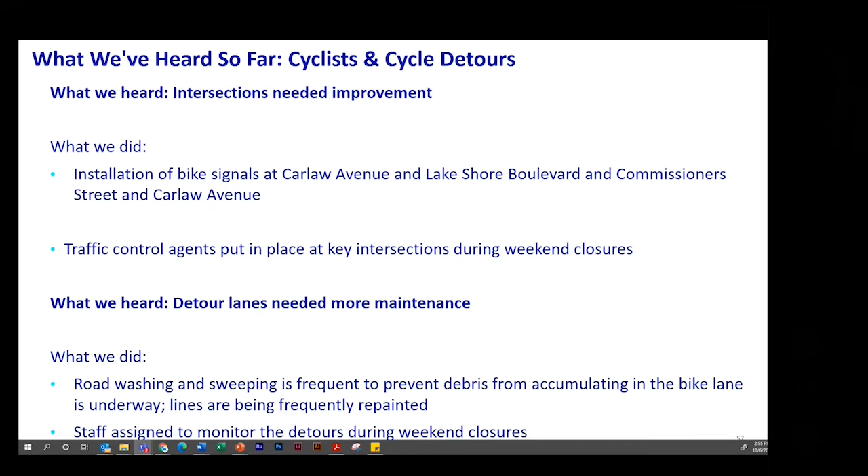We also heard early on that people felt there was a lacking connection to the Carlaw Avenue detour south of Lakeshore Boulevard for people riding south from Riverdale or further north towards Lakeshore Boulevard. So what we did was keep the trail on Lakeshore Boulevard open east of Booth Avenue, and it will continue to be open until November 30th, maintaining that north-south connection while we consider a more permanent alternative.

Now we're moving into a couple of common questions, and then we'll start our question and answer session. We thought we would proactively answer two of the more common questions we get, especially from those who are not as familiar with the project as those who've been following it since the early days of the environmental assessment several years back.

This question is more about our traffic management plan. I mentioned our traffic study and the modeling that was done. The modeling showed us that the higher demand was eastbound traffic on Lakeshore, and people want to know why the eastbound Gardiner on-ramp at Jarvis has been closed during construction. The answer, to distill it simply, is that closing the ramps eliminates the need for split signal timing for eastbound traffic on Lakeshore and Jarvis Street, which allows more eastbound traffic to move through the intersection, minimizing the backup of cars on the Jarvis off-ramp and onto the Gardiner.

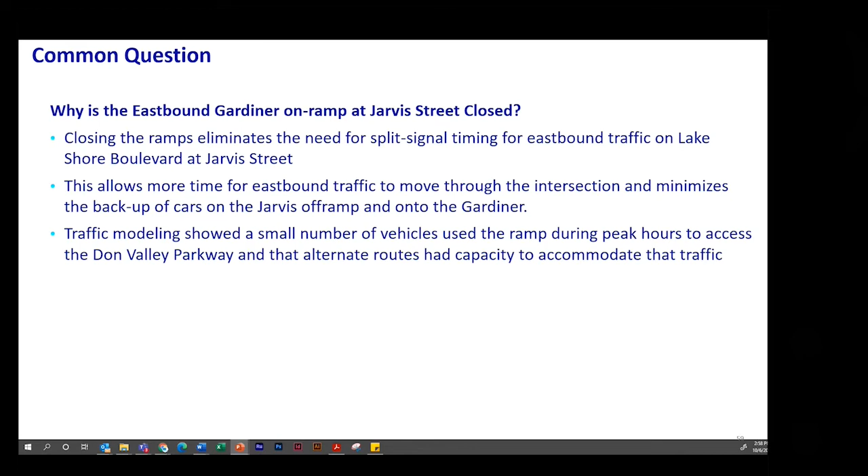This is a bigger picture question: will there be new on-off ramps to the Gardiner Expressway to replace the ramps to Logan Avenue that we've removed? Understandably a common question. The long-term plan is that they will be replaced with new ramps just east of Cherry Street, as part of the City of Toronto's broader Gardiner East rehabilitation program.

The section of the Gardiner between Cherry Street and the DVP will be realigned further north of its current location, as part of the approved design from the environmental assessment that Dawn mentioned earlier. Since the City of Toronto will build the new Cherry Street ramps off the realigned Gardiner Expressway, this needs to be built before the new ramps can be installed. The design for that section is underway now, and the estimated start of construction from the City of Toronto is 2026.

We have a link to that project page for more information in our materials, and we can provide that in the chat as well. Removing the Logan ramps now, rather than waiting until that section further west is rebuilt, allowed us to work much more safely and economically on rebuilding the Lakeshore Bridge over the Don River, which needs to happen now and needs to be lengthened, as Dawn mentioned.

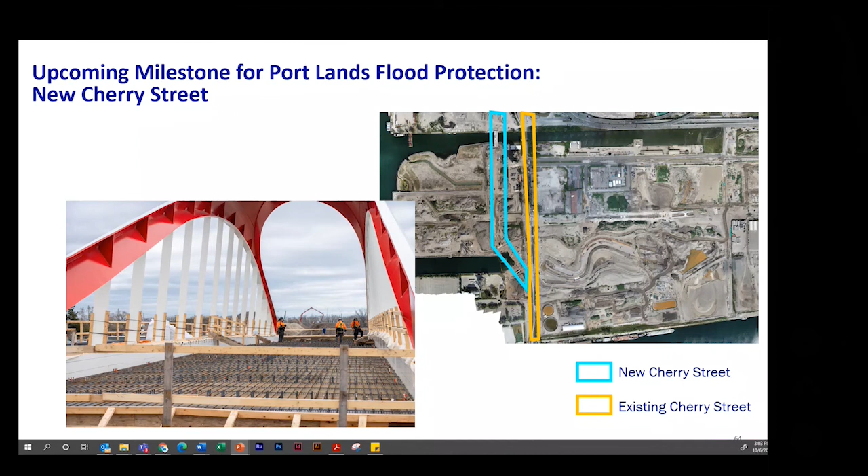Workers are preparing the bridge to pour the concrete deck. This bridge is already in, but doesn't have a deck yet, so they will be installing the forming and rebar soon. As mentioned earlier, new Cherry Street from Polson to Commissioner Streets is scheduled to open in August 2022, along with the new bridge in the south part of the alignment over the New River Valley.

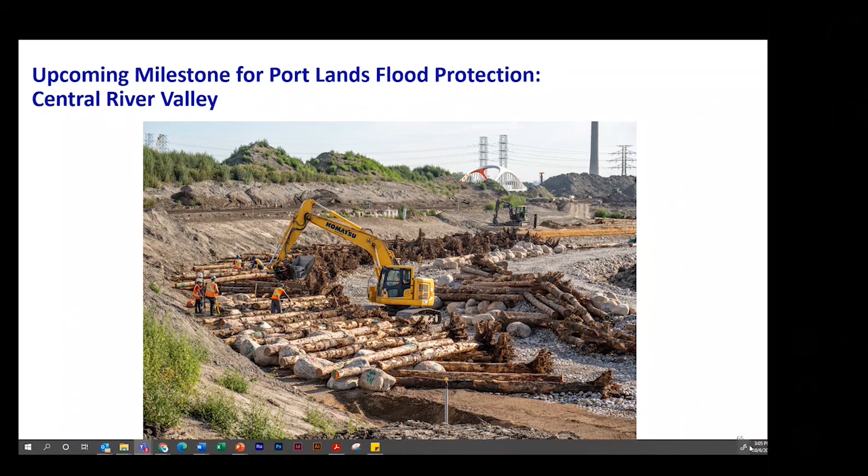The next step is to weld the two halves of the bridge together, and that area gets heated to 250 degrees while they're welding. Another fun fact: the welders have to wear a special cooling suit, which we will take pictures of because it's pretty neat.